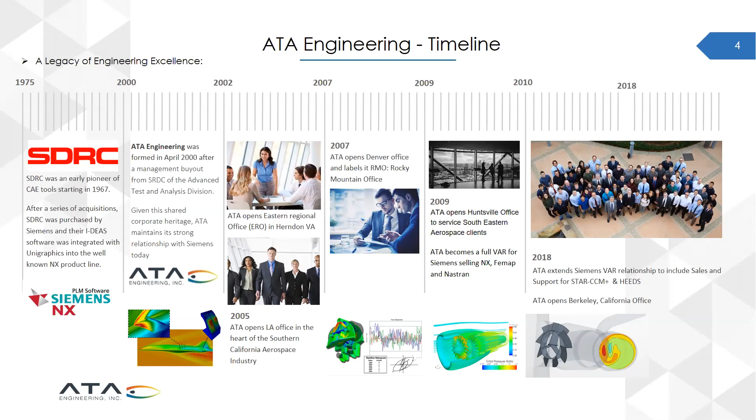A lot of people haven't heard of ATA, but we have a long lineage going back to SDRC, where we used to be a services group of SDRC out of Cincinnati. At that time they had a services group in San Diego that in 2000 split away from SDRC and became ATA Engineering. So we have a long legacy in Unigraphics, NX, and pretty much everything after that. We're kind of the world's experts in those tools, especially NX and Femap.

We're also a Siemens Platinum partner selling mostly Simcenter tools, especially STAR-CCM Plus, HEEDS, as well as NX, Simcenter 3D, all of the tools under that portfolio. Not only do we sell all of those as part of our partnership with Siemens, but we also do full support, and we've just started doing training for all of those. So really we're a full service center for all of Siemens products under the Simcenter portfolio.

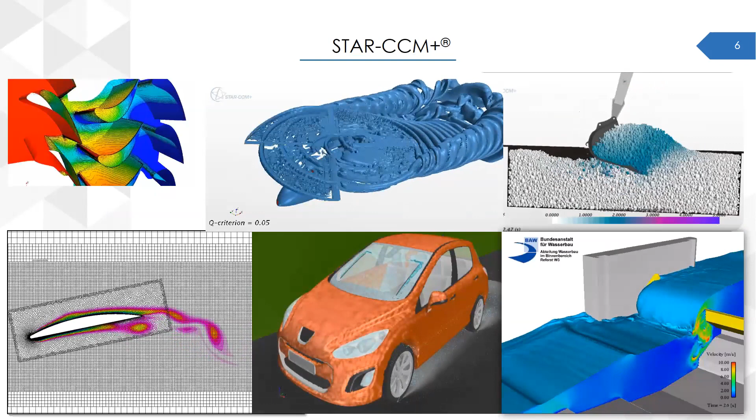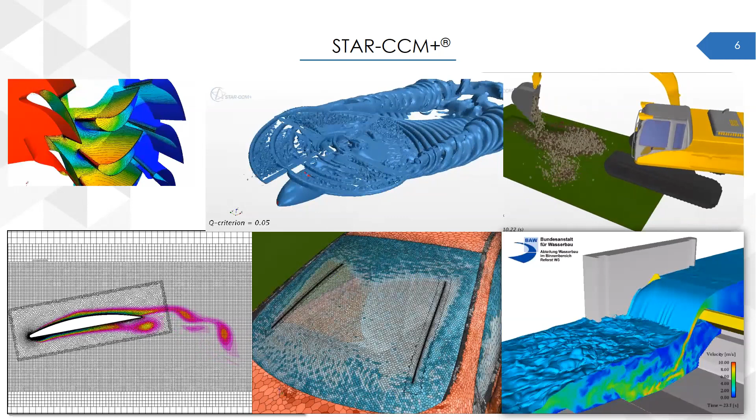As you all know, STAR-CCM Plus has a huge diverse set of functionality that can be applied to various aspects of the physics in the world. Here's just a sampling of those things, to highlight how flexible it can be. When you look at the new things added in STAR-CCM Plus 2019.3, with the new naming convention this year, it's a lot easier to follow. .3 is obviously the third release.

In our original invite for this, we did talk about doing a presentation of Simcenter Nastran co-simulation, but it turned out that wasn't quite ready for prime time from the Siemens perspective. So we had to cancel that from today's presentation, but we'll certainly revisit that later.

So the pieces that Chris is going to focus on now are these 3 parts of the new release. There might be other things people are interested in, and if you are, call us and we can talk about those in more detail. But today Chris is going to dive into more detail and show you some examples of these 3 things: the search tool in 3D CAD, to make it easier to bring in very complex geometries and filter out the things you don't need; and the generalized cylinder mesher, which has got some new things that make it much more productive.

And then lastly, the connection to NX 1847. He's going to show you some history of previous work we did using an old methodology, and now the new system for using the CAD client. So with that, I am going to stop sharing and ask Chris to take up his side of things. Over to you, Chris.

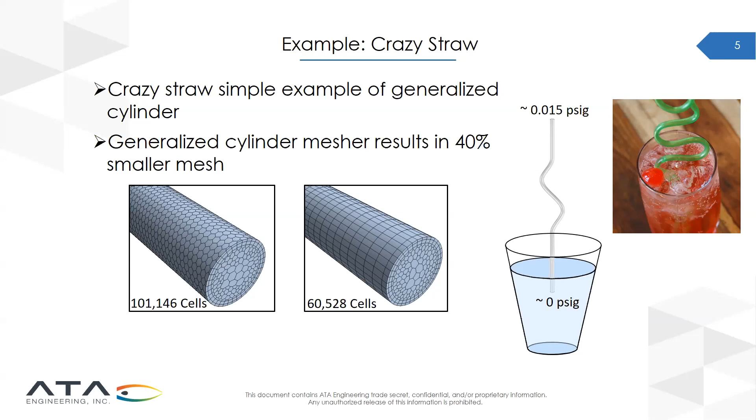Showing the results here, the results between the generalized cylinder meshed straw and the polyhedral mesh straw were similar, but given that the generalized cylinder mesh had 40% fewer cells, it ran much faster. When we look at the residuals, this is just a norm over all the residuals. I started from the same initial condition for both cases, and the generalized cylinder mesh converged at a much faster rate. So I'm going to switch over to STAR-CCM Plus here and just show you how easy this is accomplished.

This is a bit different than the geometry I showed you. Here I've got the straw and it's kind of going into a container. I just wanted to show you how well the mesher did at identifying the generalized cylinders that could be meshed, and then how it transitions to a polyhedral mesh in a region where the generalized cylinder mesher is not appropriate.

All you do to activate it is select generalized cylinder mesher, add it to the tree. I'm going to execute. It's going to quickly generate the mesh, it just takes a few seconds. This mesh initially was a little over 140,000 cells. You can see here that it identified the cylindrical geometry that could benefit from these prismatic cells along the straw portion, and then it transitions to a normal polyhedral mesh in this larger region.

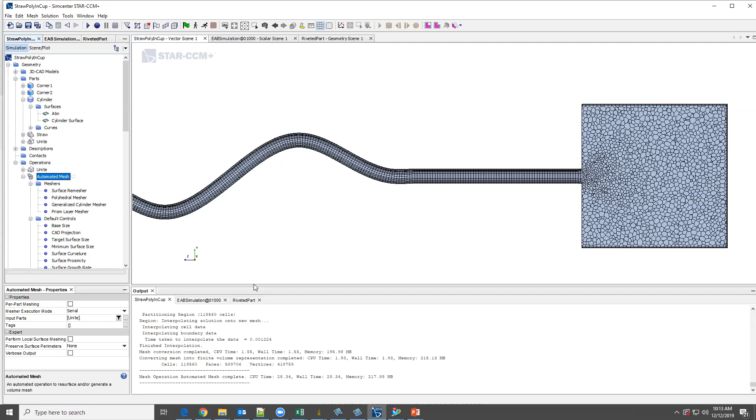So that's how easy it is to do this, and you can really get a lot of savings both in meshing time and then computational efficiency.

So are there any questions regarding that feature?

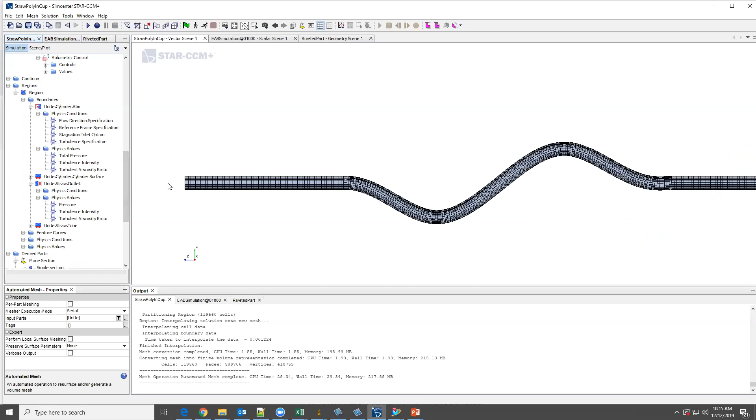Yeah. Is this what you were talking about? Yeah, but I meant in that — can you do a side view of it so we can see the end of the pipe in more detail? Yeah, let me pull up mesh scene here.

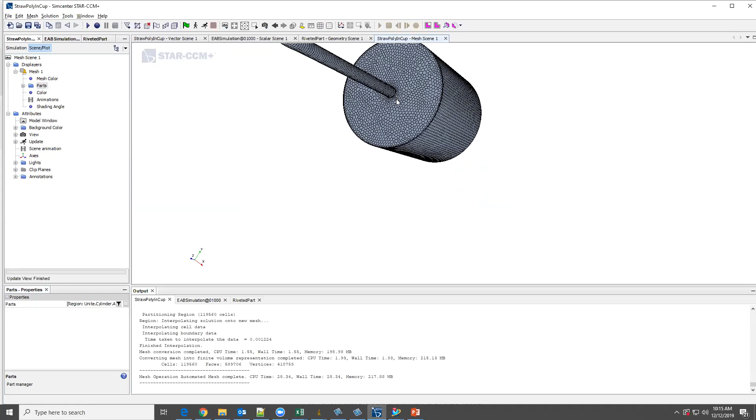One thing you might be asking yourself is, we've got a cylinder here, why isn't it applied to this portion? For the automatic detection, it looks for a certain aspect ratio of length versus diameter.

Herson asks in the chat, is this different than directed meshing? Yes, it's different, and the big benefit here is the ease of implementation. It's the click of one button to identify where to apply this directed mesh and where it's appropriate, without the user having to make additional changes or flag additional boundaries. So it's mainly a convenience and speed enhancement. Does that answer your question, Herson? Great.

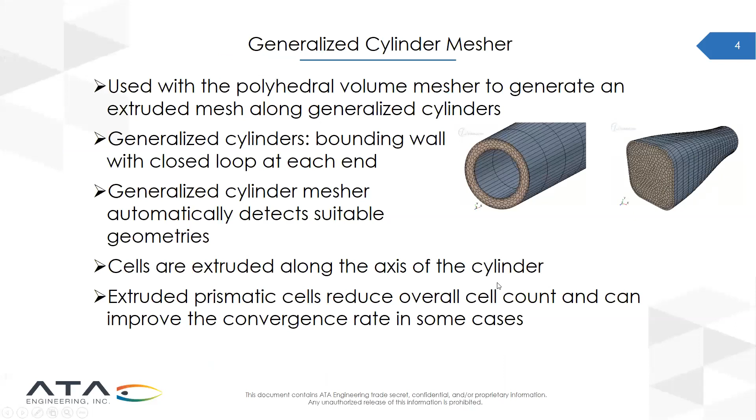The second thing I want to talk about is the search tool in 3D CAD. This is a feature enhancement for STAR's native 3D CAD tool that helps you find and organize geometric entities using search criteria based on geometry features or similarities between existing features. It can also help detect clashes between features. I'll demonstrate how you can use it to find parts or features that are similar, based on surface area, volume, perimeter, and other geometric features that are automatically detected when you flag a certain feature.

This can significantly aid a CFD analyst in geometry preparation when given dirty CAD that needs cleanup. Like in the movie The Aviator, about Howard Hughes and his ambition to build the fastest airplane, Leonardo DiCaprio runs his hands along the rivets saying he wants them gone, wants the body smooth. Similarly, a CFD analyst might want to identify all these rivets and remove them from some CAD so they can build a nice mesh to run their model on.

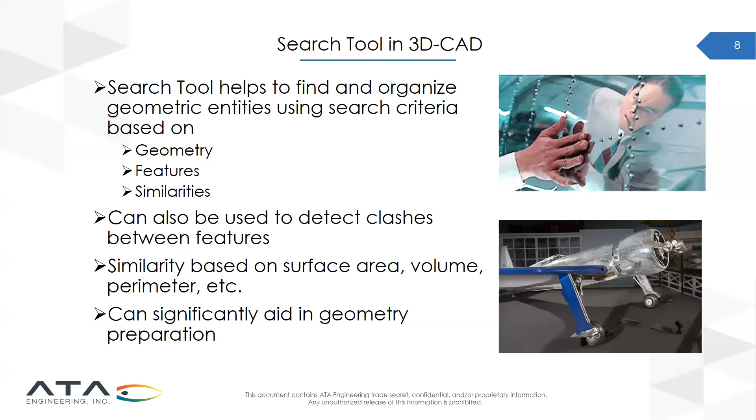Here's my example, a very simple one. We've got this bar with a bunch of little rivets on it, and as a CFD analyst I want to get rid of these rivets. I have two options: control-click 144 of these things, or use the new search tool in 2019.3 to just find similar features. That'll be my next demo here.

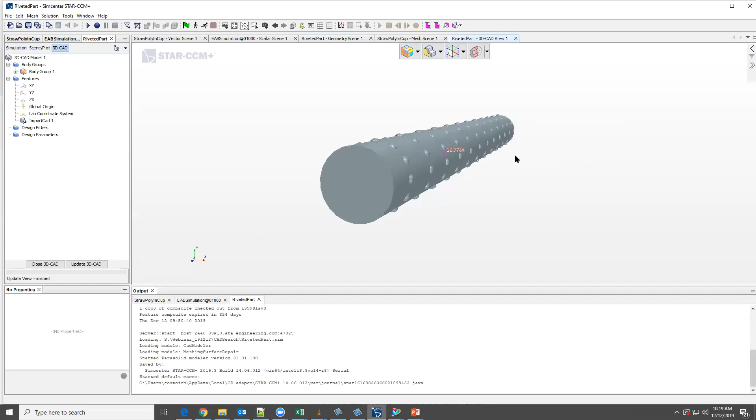Switching over, this is the geometry scene of that part, and I'm going into 3D CAD. This part was imported as a parasolid into 3D CAD. As I said, I could go through and select all of these and remove them that way, and it wouldn't be too bad since I know where they all are. But it's unlikely an analyst will want to look at a part like this—it'll likely be more complicated, and he'll have to really search for the features he wants to remove. So instead I'm going to use the search tool.

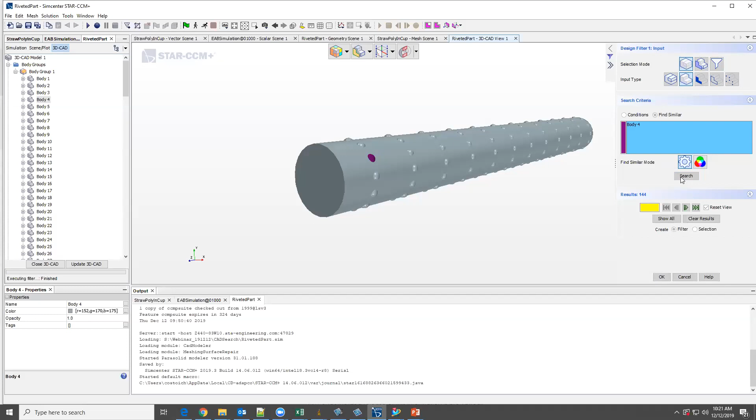What I do is open this design filter up here. My search criteria lets you set up conditions based on feature length and size, but instead I want to say find similar. It then indicates it wants me to select a feature on the geometry, so I just select one of these rivets, and then say search. It quickly finds all 144 of them. I can then direct those into a filter to use later, or just say I want those selected after I close this search tool. I say selection, press OK.

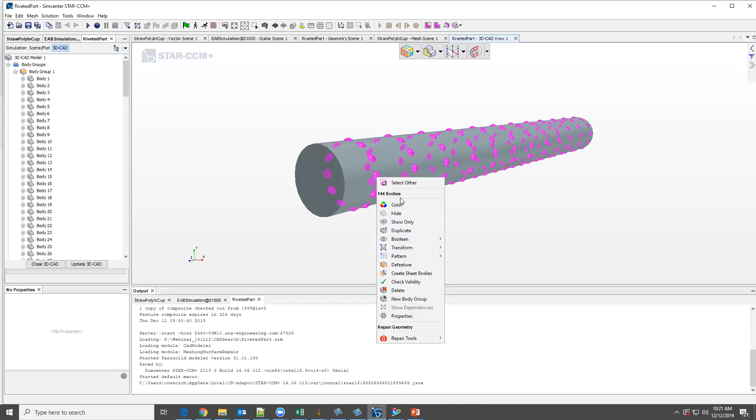Now all of those are selected. I can just right-click on one and say delete, confirm. Now when I exit out of 3D CAD and update my geometry part to reflect the changes, all of them are gone. I can now proceed with creating my mesh without having to worry about resolving all those little features.

Are there any questions regarding that? Adam asks, is that search box totally new or enhanced—is it a totally new feature in this version? It's a new feature, as far as I know. I should look—but definitely the find similar and the clash detection are new.

Herson asks, does the surface repair tool have a similar function? I don't think it does—I think this is just in 3D CAD. So what you'd want to do is bring whatever your geometry is into 3D CAD so you can operate on it there, instead of going to File, Import, Surface Mesh. You want to go to New 3D CAD and then from there go to Import CAD Model.

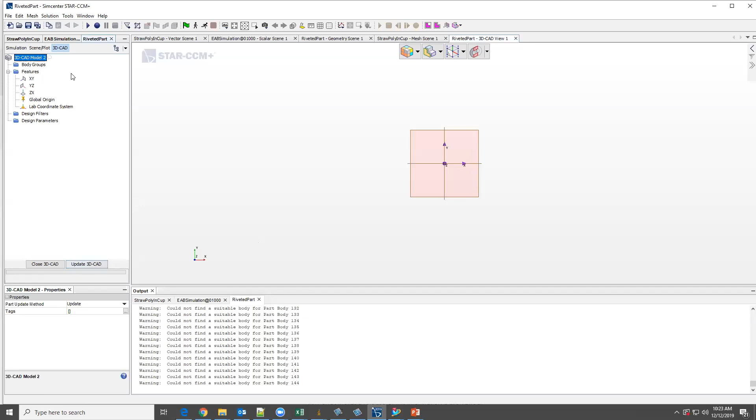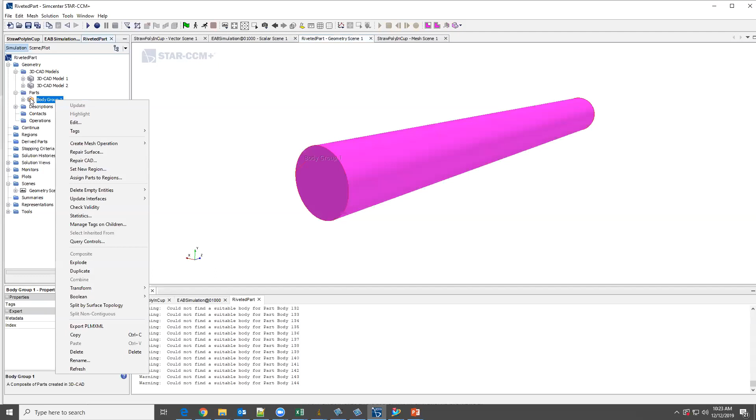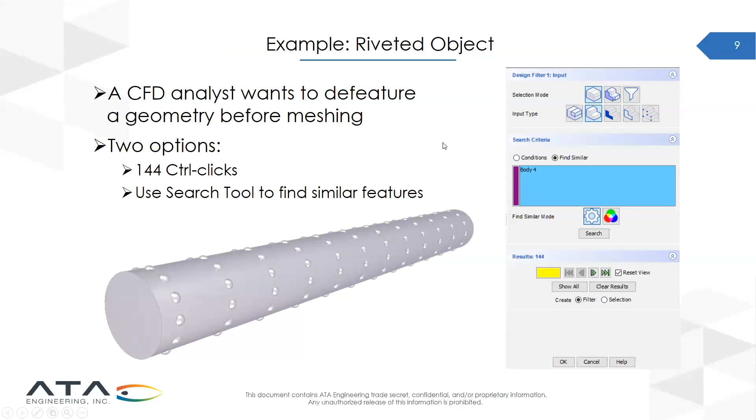So there is a workflow to get you into repair, to utilize this. I think it's a pretty powerful functionality, so maybe in a later release it will be available in surface repair. But well, I'll look at that later. Okay, so Herson is good with that. Okay, great.

Okay, so the final thing I want to talk about is the CAD client. Was there a question there? Sorry. No, you're good, okay, I thought I heard something come through. My bad.

Recently, support for NX 1847 has been implemented. This CAD client enables complicated geometries to be parameterized and modified within STAR-CCM+. I'll talk about this geometry on the right a little later, but as you can see, it's pretty complicated. If you wanted to look at several variants of it, it might be a pain going back and forth between NX or your chosen CAD tool. I want to mention that this is also supported for Creo and CATIA, but NX is the preferred CAD client here.

I'll be again talking about this geometry a little bit later. So the CAD client, in combination with STAR-CCM+, enables efficiency gains. Within STAR-CCM+, the powerful mesh operation pipeline makes design changes easily automated. Large parameter studies can be automatically accomplished with the design manager, which comes standard with STAR-CCM+. And then with the additional STAR-CCM+ Innovate license, automated design optimization on some complicated design like this is made possible.

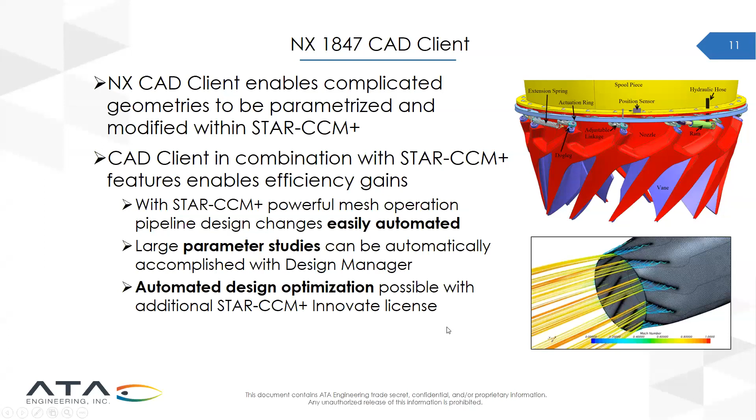So the example that I'm sharing today is actually a technology developed by ATA Engineering called the engine air brake. What this does is it's a nozzle that goes on a jet engine, which uses this deployable swirl vane mechanism to create swirl in the exhaust plume, converting engine exhaust from thrust production to drag production, or actually thrust reduction. What this does is it allows or enables slower, steeper, and therefore quieter flight on landing approach to satisfy local requirements at different airports.

So this was a large effort, and it was analysis driven, meaning that the analysis methods that we used, CFD in STAR-CCM+, informed the design. This meant that there were numerous manual CFD and CAD iterations. To develop this design here, which is the prototype design, took 150 CAD models and CFD simulations to arrive at. That equates to several hundred engineering hours in model preparation, mesh, and simulation.

Because how this was being done is in NX, the geometry would be tweaked or some parameter would be changed. The parasolid would be exported, imported into STAR. All the preparation steps would be done in STAR-CCM+. Simulation would be run, and that's one of these 150 iterations.

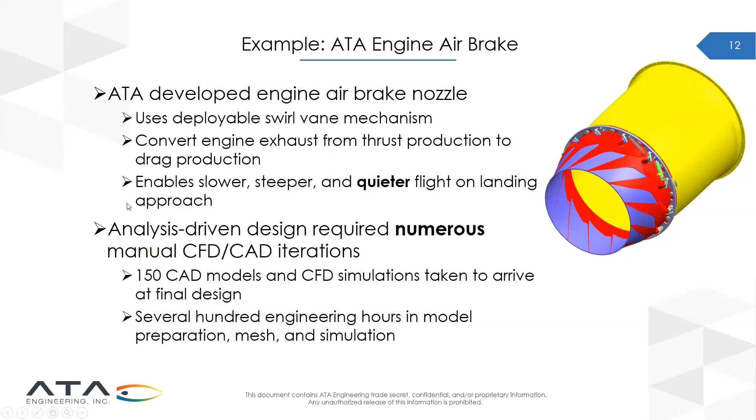So using the CAD client, this is made much more easy. The example I'm going to use is just the swirl vane angle here. So pretty much the workflow is within NX, we've got this STAR-CCM+ kind of tab here, and you just click this design data, and it allows the user to select whatever parameters the user wants to make visible to STAR-CCM+. So I just select angle here, and then that's exported.

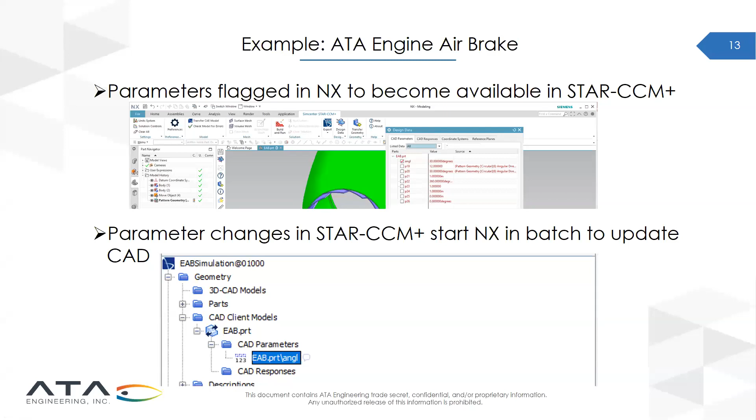And those parameter changes, those parameters are made visible in STAR-CCM+, and changes can be made within STAR-CCM+, which then start up an NX instance in batch mode to update the CAD in STAR-CCM+. So it removes a lot of the manual steps that an analyst would have to do or a designer would have to do to get the model between the two softwares.

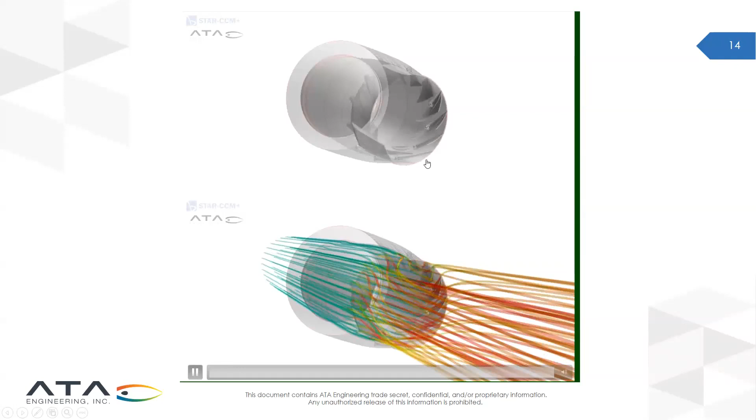So here's a video showing just 4 iterations of that, and this is done automatically. You can see here that the swirl vanes are being modified in NX, which are then passed back into the STAR mesh pipeline. STAR meshes it, runs the simulation, and what I'm showing here are the streamlines and how the streamlines are affected by the change in the swirl vanes.

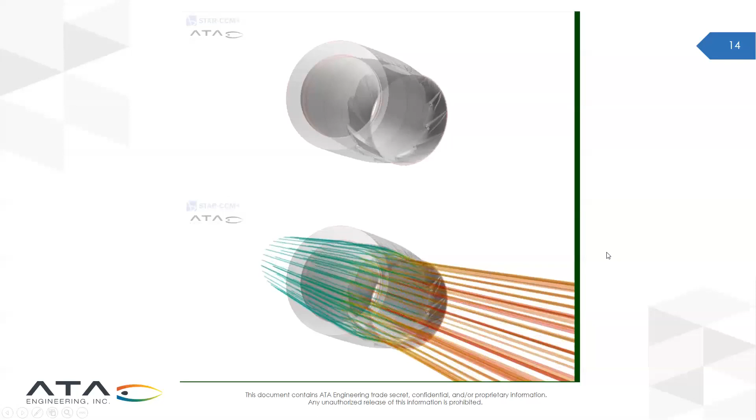So I'm just going to show an example of how easily this is done. Here I've got my engine air brake geometry. The swirl vanes are in the stowed configuration. I go over here to geometry. The CAD Client Model node is enabled, and you can see we've got the part here with the 2 arrows, meaning that there's communication between STAR-CCM+ and NX.

And then I can just highlight this parameter, change it from 45 degrees, which corresponds to the stowed condition, and maybe go to 5 degrees, which is close to fully deployed. And update the model. This takes a second to launch NX in batch mode and make the change, and then communicate that change back to STAR-CCM Plus. But it's much faster than going into NX, making the change, exporting the parasolid, bringing it back in STAR-CCM Plus.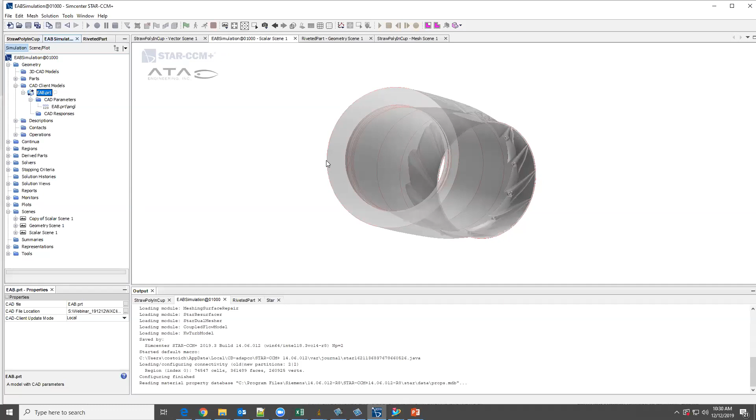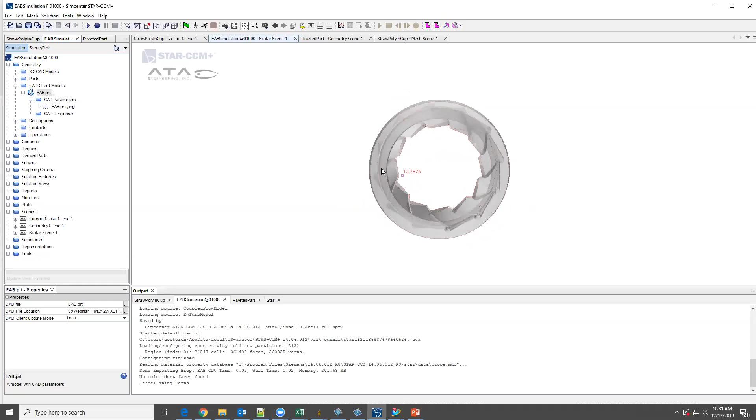Hey, Chris, this is Adam. Just a note there that you could have had NX kind of alive and running at the same time, and then it would have done a direct transfer in memory, right? Well, you'd have to, in my playing around with it, you have to kind of make the change in NX, save it, and then open that in STAR-CCM Plus. But I might be wrong about that. Okay.

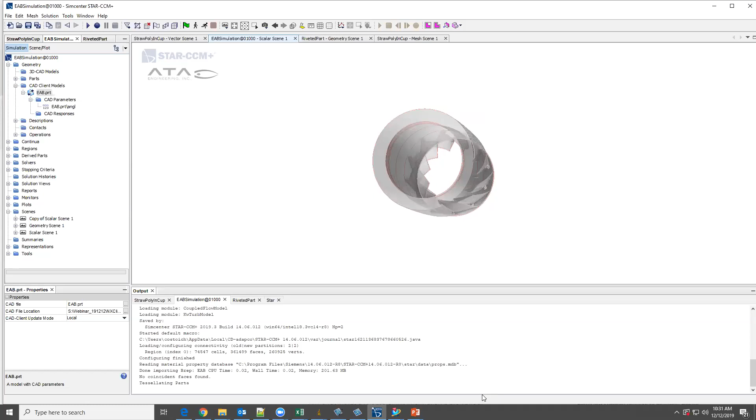But anyway, here is the new geometry with this change, and so this is just one parameter that I'm changing. But you can imagine that a number of these parameters that govern the behavior of this complicated kind of geometry and mechanism can be set up so that you can really streamline the process.

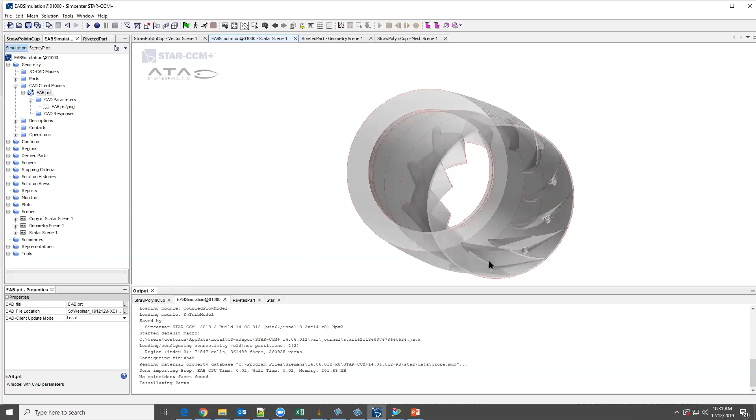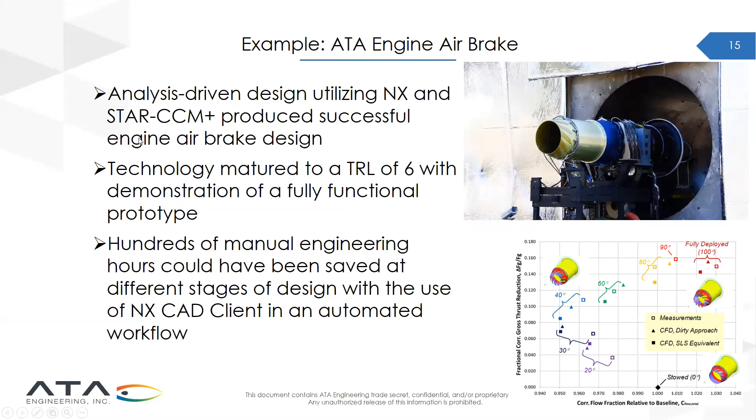Okay, and so here's a little video of what the prototype actually looked like during testing. So this analysis-driven design process utilizing NX and STAR-CCM allowed us to produce a successful engine air brake prototype design. And through this, the technology was matured to a TRL of 6 with the demonstration of the fully functional prototype shown in that video there.

You can see that with STAR, we were able to match well the experimental data that we took, and also design a high-performing engine air brake. However, hundreds of manual engineering hours could have been saved at different stages where using the CAD client could have streamlined a lot of manual labor that the designer had to go through.

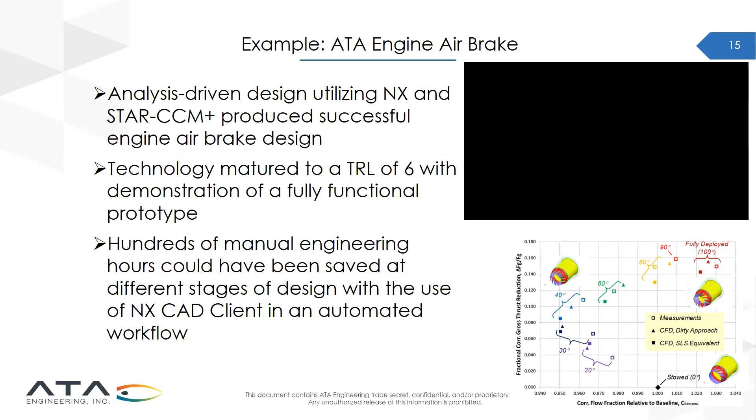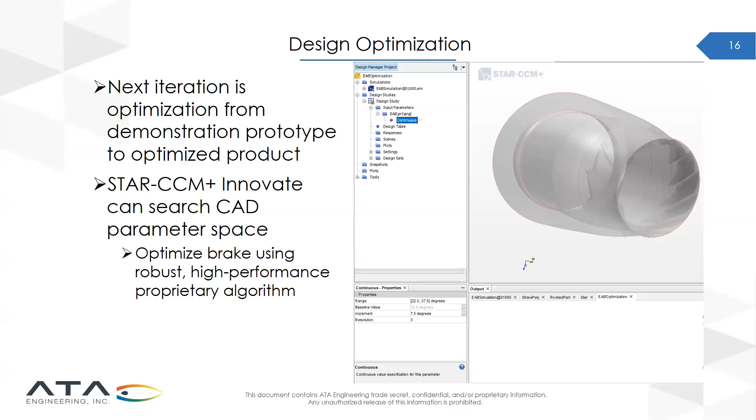And then looking forward, so this is the stage where we're at. We've demonstrated a fully functional prototype, but if we were to start building these and trying to optimize them, we could use Design Manager and the Innovate license to actually do optimization using a robust high-performance proprietary algorithm which would drive these parameters towards an optimally performing engine air brake. So are there any questions regarding that?

Chris, one thing I wanted to mention to the audience, one of the key things here is that if you adopt this process where you use the CAD client, and let's say you run a Design Manager sweep of models within STAR, at the end of that, all of those can be represented as geometries in NX in this case. And that means that if you're doing a parameter sweep or an optimization within STAR's Innovate, at the end of it all, you have your CAD ready to go and make something, either with 3D printing or however you make something. And so that bi-directional nature of going from the CAD to the analysis tool and back again is going to really save you a lot of time.

So you can do an analysis study in STAR, and at the end of it, you've got geometry ready to use however you need to. And obviously, NX is owned by Siemens, as we all know, and so the interface to NX is a little more sophisticated. But this technology and the CAD clients exist for both PTC Creo and CATIA. So if you're not using NX, you're using other things, this can still be done with those tools.